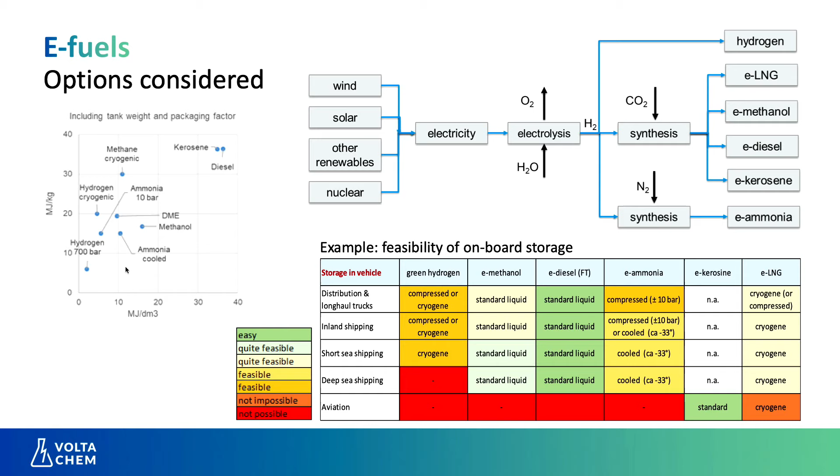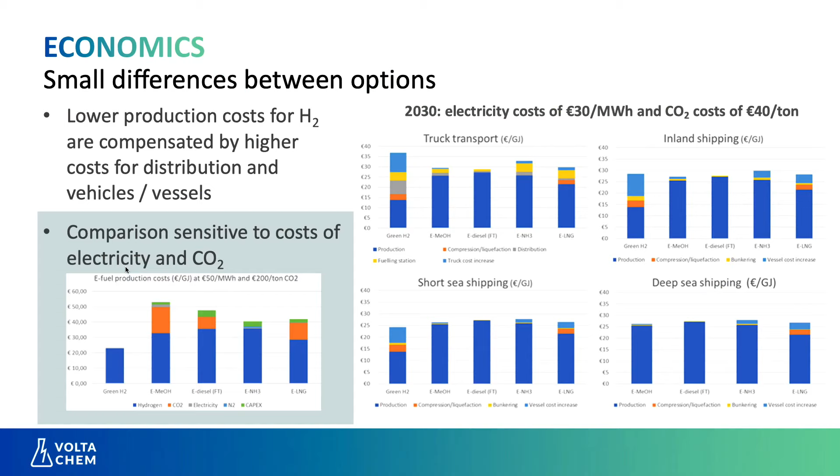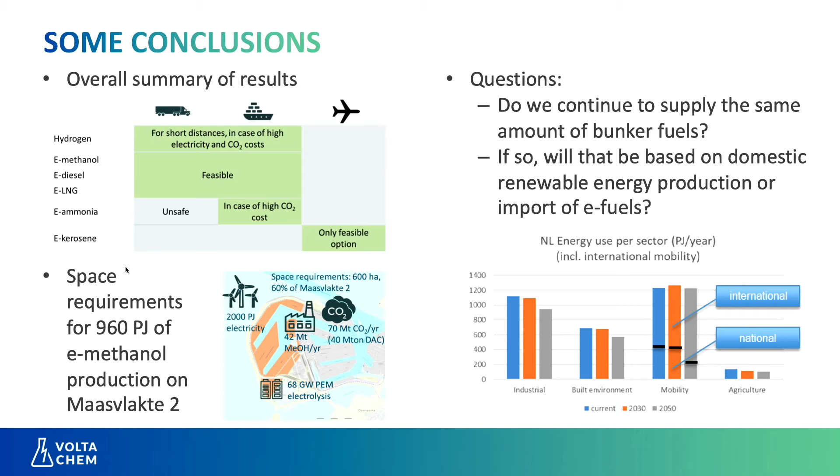Important question for the longer term is whether in 2030 and 2050 we will still be catering for international aviation and international shipping the way we are doing now. Of course, the position of the Dutch main ports, Rotterdam and Schiphol, very much depends on the abundant availability of fuels at low costs. But things may change in view of the transition towards a sustainable global economy. That has a significant impact on the amount of this type of fuel you would need within the Netherlands, and also the question whether you want to produce them yourselves or depend on import of these fuels.

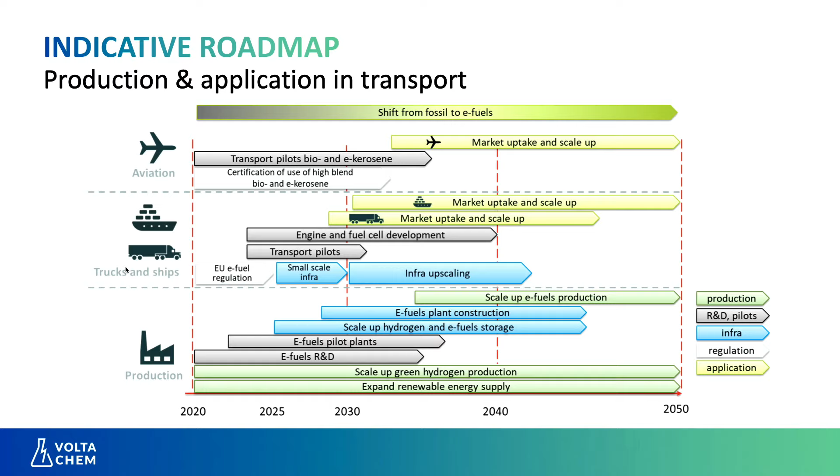Your question relates exactly to the debate that is now starting on how we can accelerate that, in view of the Renewable Energy Directive and the picture that's now clearing up on the demand for biofuel from other sectors. The demand for these e-fuels might be larger at shorter timescales than currently seen in these roadmaps. One of the interesting questions, already popping up in the context of the mission-driven innovation programs we're now carrying out in the Netherlands, is how we could accelerate these developments by looking at what the robust technologies are.

For instance, methanol production could be a robust element of a future system, where at this stage you may not yet decide which fuels exactly go to which applications, but you know that as a feedstock for a number of both industrial and transport applications, methanol could be a feasible first step, a sort of no-regret option. I think that's part of the discussion we need to have in the coming year, to see if there are clever ways of accelerating this development without making the wrong choices, investing in things that create a lock-in at some point.

Thank you, Richard, very clear presentation, I must say. Thanks, you're welcome. Maybe there will be some questions during the Q&A later on, but for now we have to move over to the next speaker.

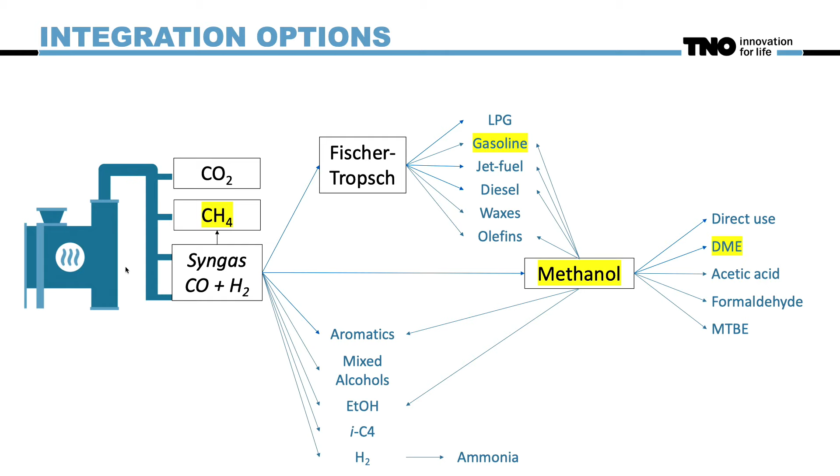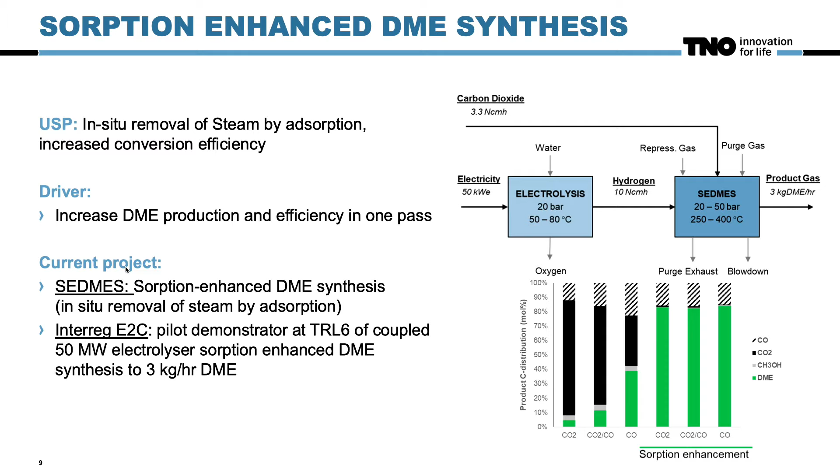But this can also be very easily integrated with, for instance, a gasification process, where you have a synthesis gas that is a combination of CO, CO2, and hydrogen, and you can go to DME synthesis. So those are the things we are looking into today, downstream of gasification options to convert various types of biomass.

The question obviously always is: is this interesting? If we go to the next slide, I try to depict some work from Hannula, who published some work in terms of the pricing, levelized costs of fuel.

Because for every technology there is a cost involved. I don't think we should compare with fossil fuels, because whatever type of biomass or electrofuel, it will be very difficult to compete with the fossil source. But depending on, especially, the price of electricity, when you're talking about electrofuels, when the cost of electricity is really low, it becomes interesting to look at these e-fuels, or to have a hybrid version combined with, for instance, a gasification option. Can also be other types of biomass conversion, but in this paper it is specifically on gasification.

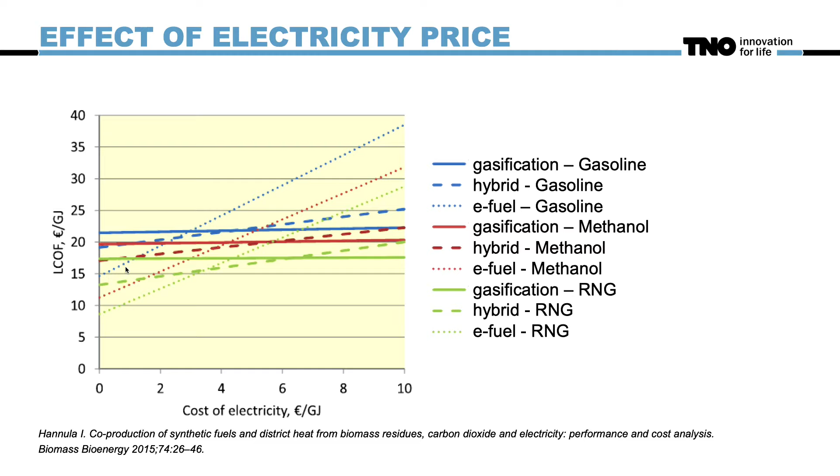Gasification is a technology that is not so much dependent on the electricity price. Electrofuels are. What you see is that if the electricity price drops below 3 euros per gigajoule, then it becomes favorable to use these fuels, but also the options to combine are in the range of 2 to 6 euros per gigajoule. So think about 1 to 2 cents per kilowatt hour.

In the next slide you see something similar, but for biomass, because the price of biomass very much determines the price of the fuel. Just to give you a reference, if you look at demolition wood, that's 1.9 euros per gigajoule. Clean wood pellets are 9 euros per gigajoule. So you're already in the lower left part.

If demand grows, I would suspect that the prices of biomass and agricultural residues will also increase, and therefore e-fuels become more and more interesting.

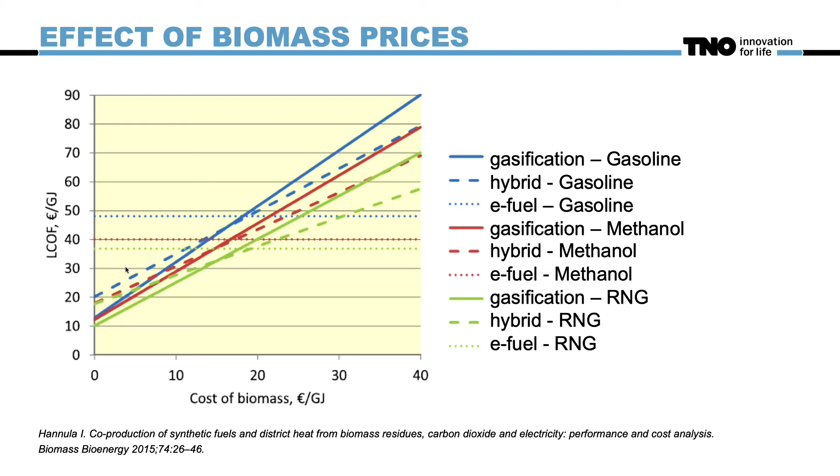So in short, we have a challenge. There is a lot to do, and we have to replace a lot of fuels. There is an urgency. If we want to do something in 2030, we should start now. Look at high TRL, like gasification, and as I said, if things change and we have larger production of hydrogen, cost will go down. It will be very interesting to combine these technologies together.

Thank you, Stefan. Very clear. Totally agree with your saying that we should speed up right now.

So the next step, we are building this technology in a container-size unit, and we're going to travel around the Netherlands, where we have different sources of CO2, different off-gas streams, and there we are going to produce the DME and do some more testing. But that's the final step before we go to full-scale production, I would say.

So you take the CO2 from industrial processes? Exactly, as a sort of carbon capture. There's different technologies that can be enhanced, but it can also be just an off-gas where you have some CO2 in it. Because this sorption-enhanced technology works really well, so you can easily do these two steps in one. So it doesn't need to be directly pure.

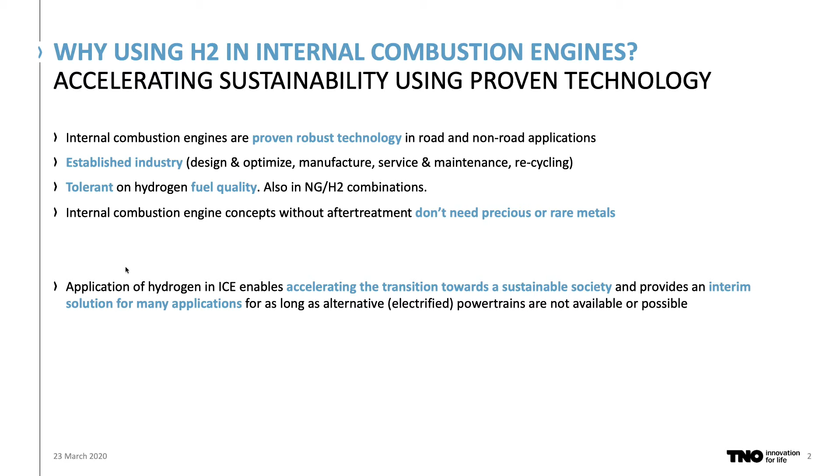So on the next slide, I've shown here a graph to illustrate why the combination of hydrogen and the internal combustion engine is very interesting. Main reason here is that it does has the potential to provide high efficiency in combination with very low emissions. The graph shows the NOx emissions and the efficiency as a function of the air excess ratio, lambda.

We all know that from thermodynamics, efficiency gradually increases with the air excess ratio, which is shown by the green line. And NOx emissions are typically highest at slightly lean conditions and then gradually reduce when the mixture gets more lean. That's shown by the red line.

One very nice property of hydrogen is that you can burn it in a very lean way. If you take it in comparison to, for example, natural gas, then natural gas has a limit of about lambda around 2, where hydrogen can be burned steadily and stably well above 3.

And if you look at this graph and we look at the dotted purple line at the bottom, which is the NOx limit of current legislation, the Euro 6 stage 5 legislation, then we see that for air excess ratios above around 2.2, NOx emissions are already below the legislative limit, which also means that above this limit you don't need any NOx after treatment.

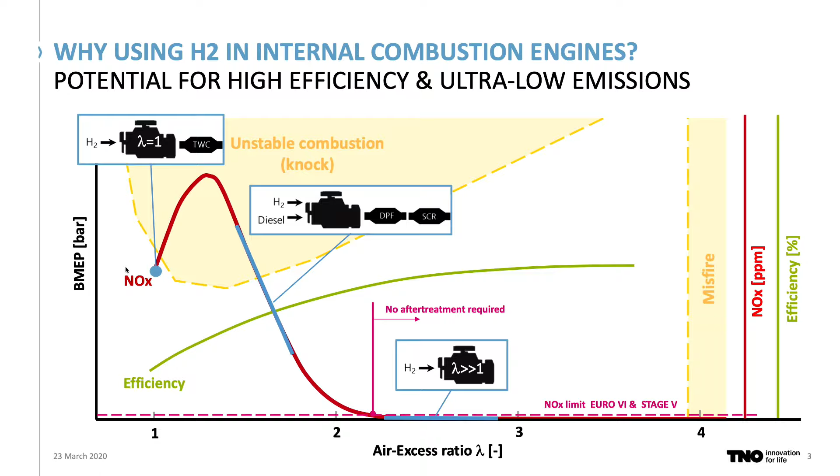On the next slide, I've made a high-level comparison between these concepts relative to diesel. So here the diesel engine is shown with 100% power density and efficiency of around 46%.

So if we look at the concept of the stoichiometric engine, the lambda 1 engine with after treatment system, then we see that this engine has a relatively low efficiency, very typical to normal gas engines, around 37-38%, where mainly the throttling losses reduce the efficiency. And power density is lower as a result of the displacement of air by hydrogen through the injection of the hydrogen in the intake.

And also specifically for the lambda 1 engine, the NOx tendency is very high, which also reduces the maximum allowable load.

A very interesting concept is the lean burn spark ignition engine, with the potential of also running without after treatment. It's also a 100% hydrogen solution like the stoichiometric engine. Here you can benefit from the faster burn of hydrogen to have high efficiencies, diesel-like and potentially even higher than diesel. Again, a slight reduction in power density is seen, which can be partly mitigated by applying EGR, and also in the future maybe by applying direct injection of hydrogen technology.

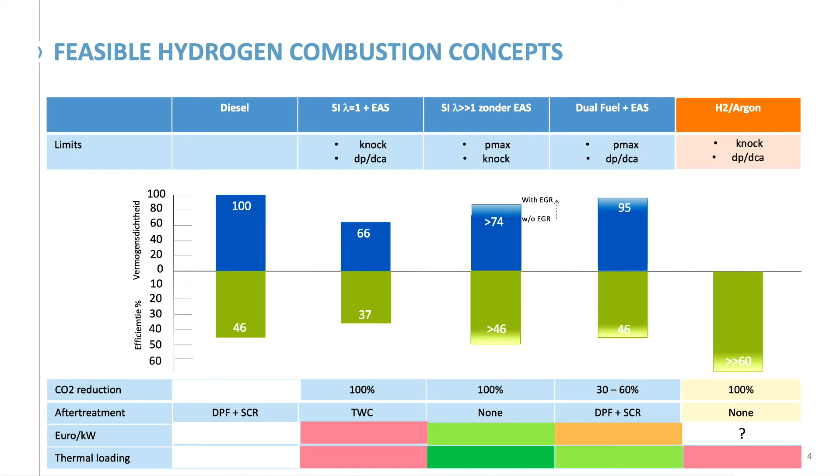As a fourth feasible concept, there is a future concept which is the combination of hydrogen and argon. Here we replace the air by argon, which has a much higher specific heat ratio, enabling much higher efficiencies, potentially even in excess of 60%. It's a future concept, currently in development, for example at the Eindhoven University of Technology.

So what are then the applications of the hydrogen engine? That is shown on the next slide. For these different applications or concepts, there are also different applications targeted within different time frames. If we look at the 2020-2025 time frame, we mostly foresee the hydrogen engine for off-road application, where the dual fuel application is feasible for shipping, near coast, inland shipping, and also tractors.

For the 100% hydrogen solutions, the main target applications in this time frame are stationary power generation, where the stoichiometric hydrogen engine with three-way catalyst may target the lower power ranges, and the lean burn concept without after treatment targets the higher power range.

If we look at the 2025-2030 time frame, there we see a more transient solution feasible, where we combine the hydrogen engine as a range extender with a battery in a hybrid truck or a tractor.

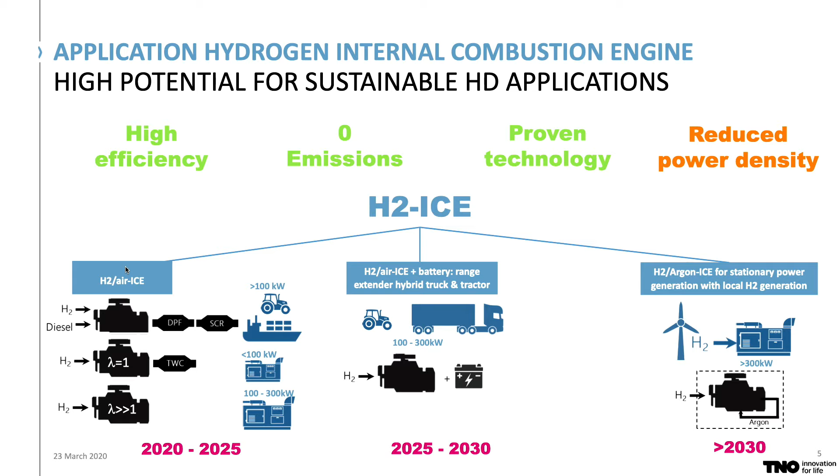Thank you, Xander. We already got a question through the Q&A, which I want to pose you right away. It deals with the fact that you claim the power density of a lean burn hydrogen engine is low, but are there no ways to overcome that power density issue by turbocharging extra?

Of course, by the application of EGR, you can reduce lambda a bit, again without increasing the NOx emissions, which already reduces the loss in power density. At the same time, the EGR is used to extend the knock limit, which also allows you to generate more power from the engine. So next to future technology like direct injection hydrogen, these are already means to reduce the loss, potentially to no loss at all, but that is also part of research.

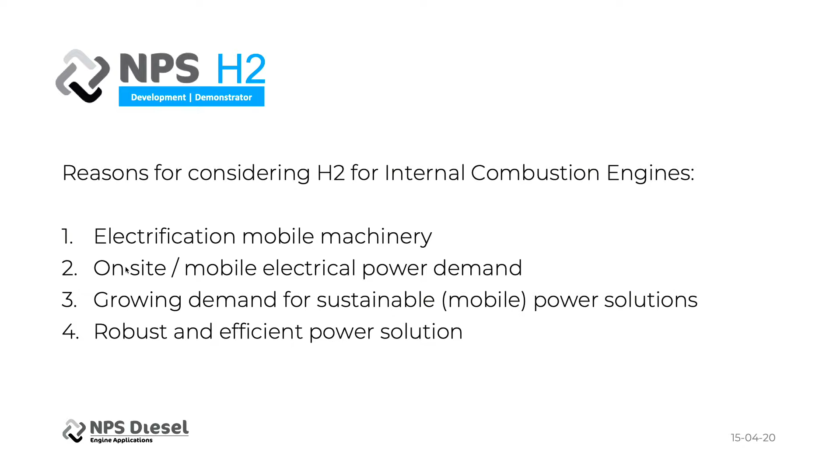The other one is very obvious: on-site power demand, like festivals, like construction areas. Everybody knows the recent problems why we all drive 100 kilometers per hour. There's a lot of focus on clean power solutions on every construction site where there's a diesel generator. The near future could be that those generators are replaced by internal combustion engines that run on hydrogen, similar to the growing demand for mobile power systems on festivals that run on hydrogen.

The market we are in is a very conservative market. They are a bit afraid of electrification and fuel cell technology because of their cost. It's very sensitive, they like the current diesel engines. If we could provide them with a similar product that is very resistant to vibration, with good fuel quality and environmental impact, they would like to have that product. So there is a market demand, which is good, I think, on short term for such an engine.

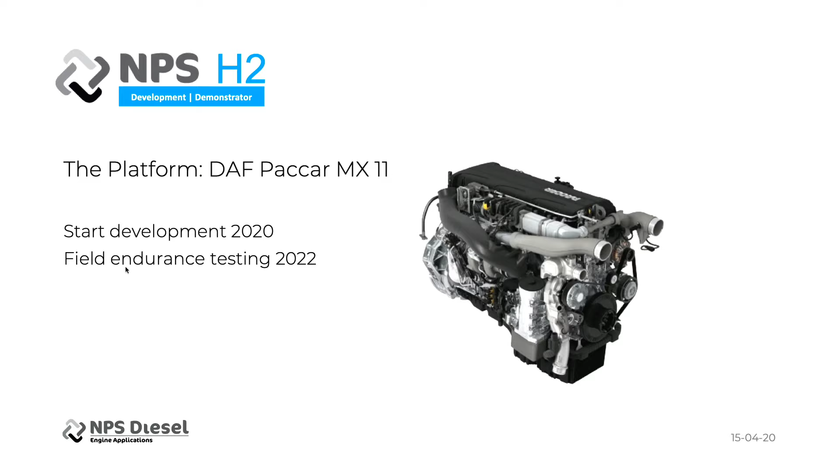Like Sander expressed in more detail, I think the modern diesel engine is very much suitable to use as a platform for hydrogen because of the ability to resist high peak firing pressures. It is equipped with high pressure cooled EGR. So it's not a copy-paste product for hydrogen, but the platform is very much suitable as a starting point for developing an engine that can compete with the current diesel engine when it comes to power density in the future.

Next slide, please. Some applications.

This is a typical application. Bredenoord is one of the partners in the project that has a very high interest in these type of solutions. As I mentioned, the electrical grid is not always ready to cope with the high peak power demand due to electrification and solar power. It's getting more dynamic, which means we could help the electrical grid by installing grid solutions that run on clean fuel, and a conventional generator running on diesel could be replaced by a generator set running on hydrogen to make it clean.

I have another example, this is another partner in the project, a firma Heerema. They have sustainability very high in their strategy. They are currently building big wind farms near the coast on the North Sea. During this construction, they are not allowed to exceed a certain noise level, and to prevent that, they have a curtain of bubbles in the seawater to protect animal life from a high noise level. It's also measured and restricted by law that they have to do this.

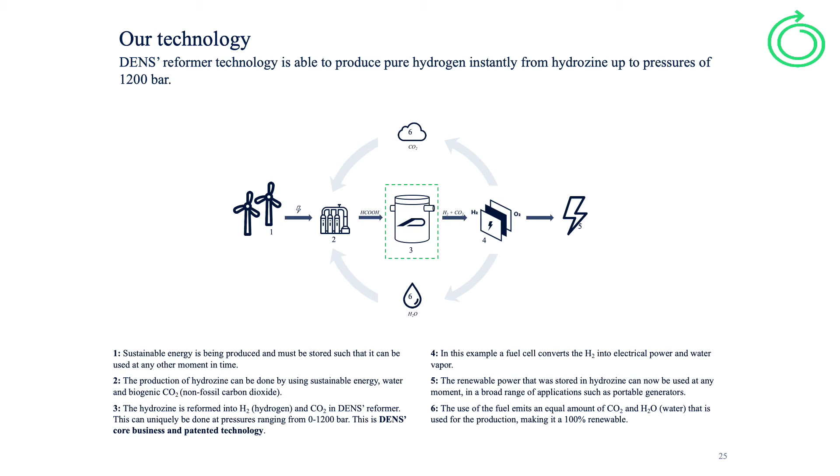Can you go to the next slide? Yeah, we are, there is a bit of delay. It will be on soon. Okay, let me see.

Great, so what I tried to display over here is when you look at the top. One of the upsides of using formic acid as a liquid fuel is the fact that it's a liquid at atmospheric pressures and temperatures, and that you can handle it in a relatively safe and similar manner as you are doing with diesel at the moment. So depending on the fuel quality, the flash point is below or above 60 degrees Celsius, which has a huge impact on the safety regulations, of course. Regarding the infrastructure, the liquid infrastructure can actually be reused, depending on the material type of the infrastructure, of course, but it's low tech and comparable to what we already have.

In the upper case, on the right top side, you can see equipment. You see a power generator and an excavator. What we do there is we integrate a reformer into such a piece of equipment, and the hydrogen and carbon dioxide gas that's being produced can either be used in a combustion engine or in a PEM fuel cell. And that's when we integrate the reformer into equipment.

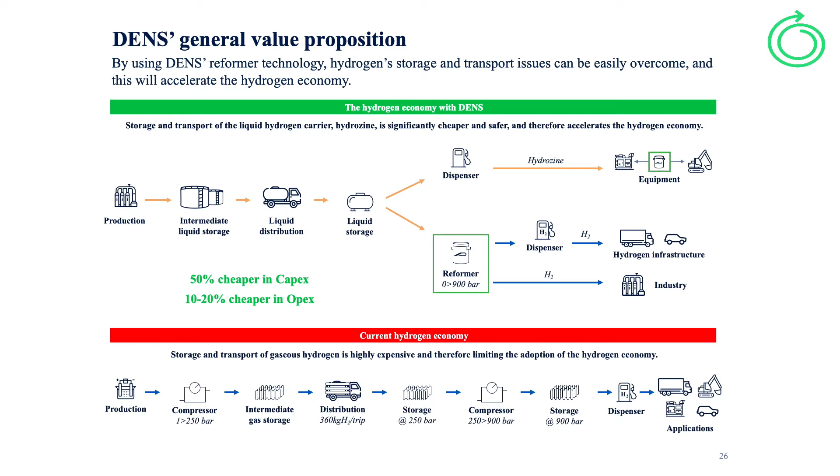But what we also can do is place the reformer somewhere in the infrastructure, for instance, on a hydrogen refueling station, and there you can produce clean hydrogen on demand from the liquid storage up to pressures of 1200 bar, and of course 900 is the pressure that you need there. We've then done a feasibility study together with Pitpoint, and the conclusions there were that we have potentially a cost reduction of 50% in capex and 10 to 20% in opex when you compare this hydrogen refueling station to a hydrogen refueling station that is relying on compressed hydrogen gas that has to be shipped there.

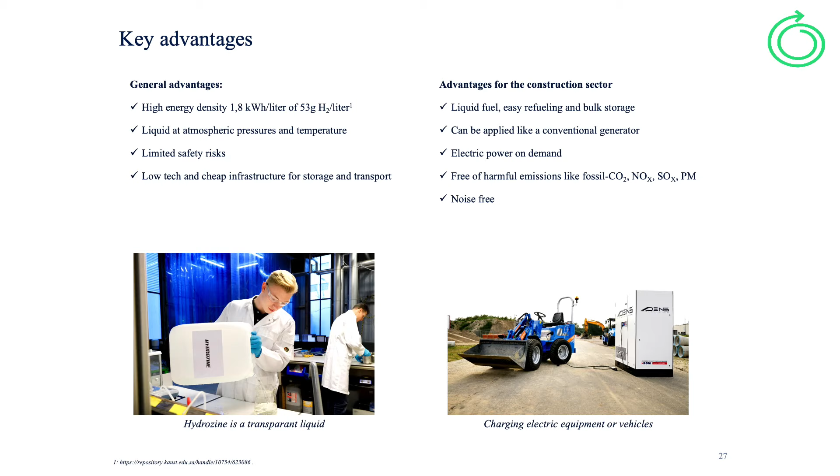Currently, we are 100% focusing on the construction sector. On the right bottom side, you can see our first power generator that's actually used on a construction site to charge electrical equipment. And the upside, of course, is no noise, no emissions, electricity on demand, and since the fuel is a liquid, it's quite convenient to use and highly comparable to a conventional diesel power generator. Next slide, please.

So this is actually the timeline that I was referring to in the beginning of my presentation. In 2015, we started this development at the university, and after a few months of experimenting in the lab, we created a small car that could drive on formic acid. Then we founded the student team and built a 1 meter scale model of a Porsche. After that, we came into contact with VDL, who asked if we could make it for a bus. We took on that challenge, but it was just a bridge too far to scale it up 1,000 times and also make it mobile applicable. So that's why we chose to put it in a stationary pilot project together with BAM in the construction of a road in The Hague, and that was in June 2018.

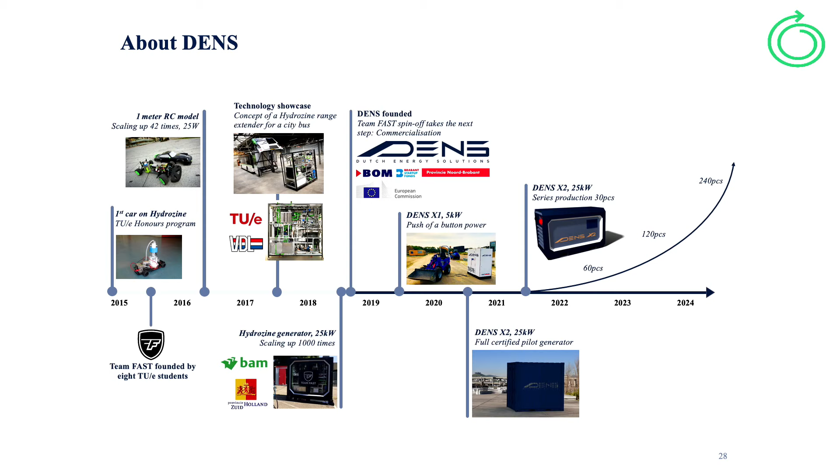After that, we founded Dens, and we've made a few prototypes, and currently are working on the 25 kilowatt prototype, which should be finished this summer. From next year onwards, we actually want to start producing these generators in series production. So currently it's TRL 7, and before the end of the year, we would like to reach TRL 8, and then hit the market, so to say.

So that's the story from our side. Thank you, Max. We got a question, and it refers a little bit to your excursion towards VDL, where you tried to make this mobile application. The question here is: can you make this work for a small system like in a truck?

Oh yeah, definitely, we have no doubts about that. The only reason why we didn't fully succeed in making it drive with the VDL bus is that we were not far enough yet with the technology.

So we didn't have enough experience, and the system that we eventually made was too big, and it was not suitable enough to really drive on the road. But if we would do it over again, yeah, definitely.

But then it would be sort of a backup charging station in a truck, right? Because your maximum power is like 25 kilowatts, as I see it. Yeah, the 25 kilowatt now, that's the choice we've chosen now, but we can also do 100 or higher. That's just depending on the fuel cell that we choose. So there's no real restriction in scaling that up.

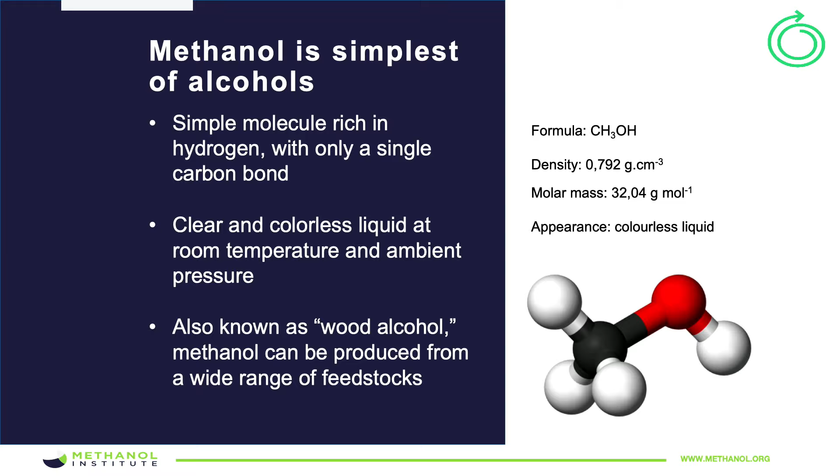So it was quite pleasing to hear the first two speakers mention methanol very frequently. And it actually makes a lot of sense because methanol as a molecule actually contains a large amount of hydrogen. As you can see, there are 4 hydrogen atoms and only 1 carbon and 1 oxygen atom in a methanol molecule.

And when we talk about alternative fuels, I often mention one of the big benefits of methanol being that 1,000 liters of methanol actually contains more hydrogen than 1,000 liters of hydrogen does. I won't go into the specifics of why that is, but roughly speaking, a cube of methanol contains approximately 3.3 times more energy than a cube of hydrogen at 700 bars does. So when the objective is to find a pragmatic way of distributing hydrogen in the existing transport market, then methanol is a very convenient way of getting the hydrogen molecules to the end user.

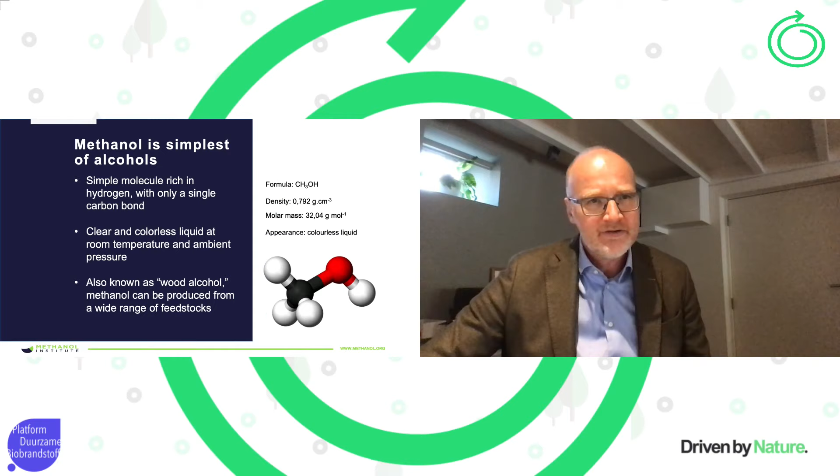If we can go to the next slide, please. One of the key purposes when we talk about hydrogen or alternative fuels in transportation is the fact that we're trying to reduce the carbon emissions from transportation. And that also means that where conventional methanol today is being produced from natural gas primarily, we need to find alternative pathways to produce methanol from biogenic or renewable sources.

And as was mentioned by Mr. Jan Bruce from TNO, there is no such thing as one simple solution. There is no silver bullet. And the same can be said for the different production pathways for renewable methanol. If we look at the ways that renewable methanol is being produced today, there are quite a few different pathways.

Probably the best known example in the Netherlands is BioMCN in Delfzijl, which is using biomethane as an alternative to conventional methane to produce biomethanol. And biomethane is made through the fermentation of biomass. But that same biomass can also be gasified to produce a syngas from which methanol can be made.

A good example is the Enerkem project in the port of Rotterdam, which aims to convert municipal solid waste and other waste streams into methanol. But only last month, for example, Södra in Sweden announced that they've started to produce methanol from their pulp process, which is a kraft process. In that process, they are able to distill the methanol from one of the waste streams. So those are some examples of biogenic pathways to produce biomethanol.

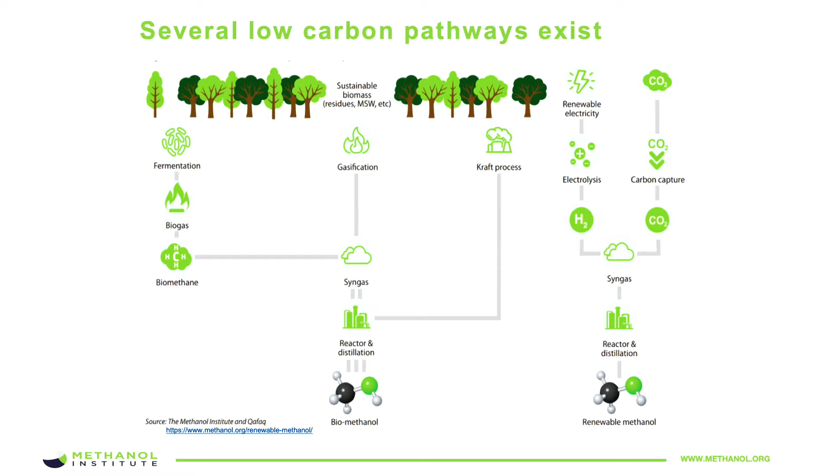But obviously in the context, especially when we talk about hydrogen from renewable resources, a lot of attention goes to the alternative way of making methanol, which is to use renewable electricity to produce hydrogen through electrolysis and then react the hydrogen with carbon dioxide to form methanol.

Probably the best known example of a company that does exactly that is carbon recycling in Iceland. But closer to home, there's a big project in Sweden called Liquid Wind, which aims to produce e-methanol from offshore wind power. And even closer to home in Germany, Total intends to produce e-methanol from the carbon dioxide from their own refinery.

And as was mentioned in the first presentation from VoltaChem, methanol cannot be used in jets, although it can be used in turbines, but that's a different story. You wouldn't want to use methanol as an aviation fuel, but there's a project in the port of Hamburg where they intend to convert methanol into kerosene.

That is why methanol makes a very interesting hydrogen carrier, because irrespective of which fuel ultimately has preference in the market, methanol is a very versatile product that can be converted into a range of different fuels for conventional diesel engines, spark ignition engines, and fuel cells.

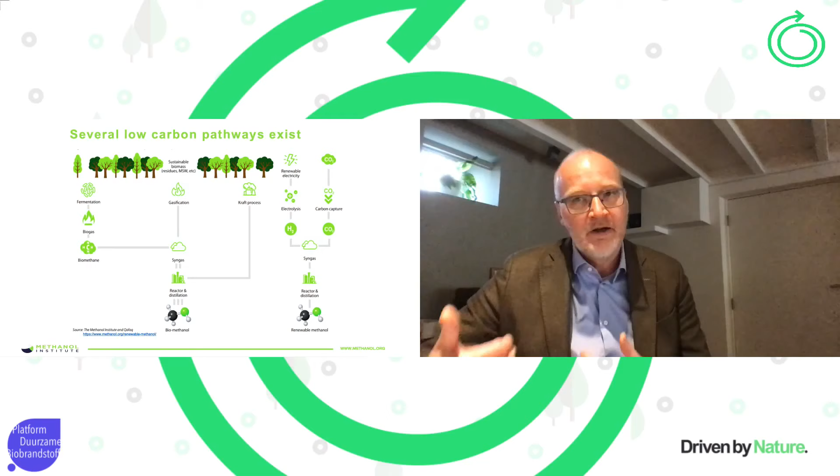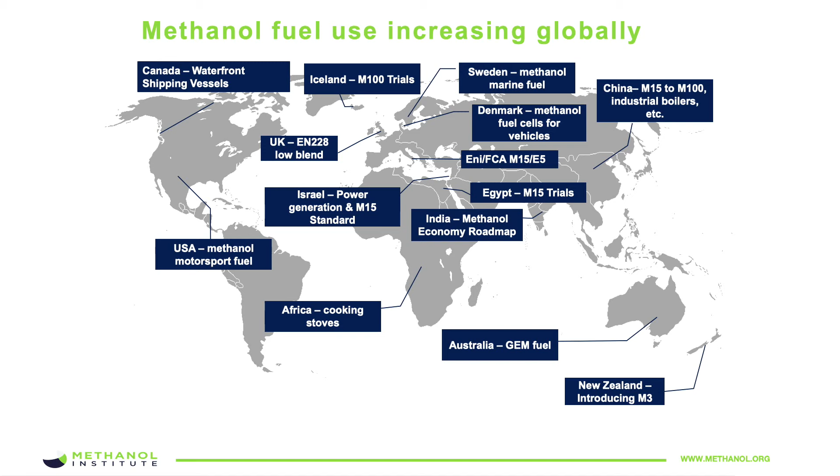In spark ignition today, China focuses primarily on 15% methanol use in standard road vehicles. In Europe, we're testing, amongst others in Italy with Fiat Chrysler, but also with BMW in Munich, a blend of 15% methanol and 5% ethanol. The reason for doing so is because with existing conventional unmodified engines, it helps to reduce the tailpipe CO2 emissions, which is a practical way for these OEMs to get closer to the 95 grams per kilometer threshold that they're required to meet.

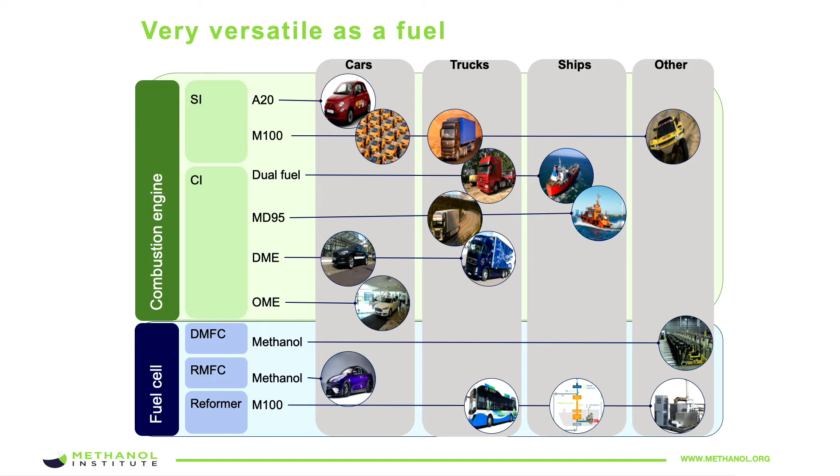We have a cooperation with TNO and Delft University, which focuses precisely on those markets - inland waterways and coastal shipping. It's called the Green Maritime Methanol Project, where we are trying to introduce methanol as a solution for those types of markets. There's also an international consortium with Lund University, which has received Horizon 2020 funding for the so-called Fastwater project that looks at developing high-speed engines.

Besides methanol as an energy carrier, which was mentioned a few times in previous presentations, methanol is a very interesting product to convert into other energy carriers as well. I didn't include the example of methanol to gasoline, but I did include DME and OME. DME, dimethyl ether, is basically for diesel engines what LPG is for gasoline engines - it's a gaseous product, but the very interesting benefit of DME is that it can be used in standard diesel engines with very minor modifications, like changes in the seals and the ECU, while still operating in full diesel mode.

OME is oxymethylene ether, a liquid form also derived from methanol, which can be blended into diesel. That's still very much at an early TRL level, whereas DME technology has already been demonstrated by Volvo in Sweden probably over a decade ago. Today there are Volvo and Mack trucks operating in the city of New York, demonstrating the use of bio-DME from a factory in California.